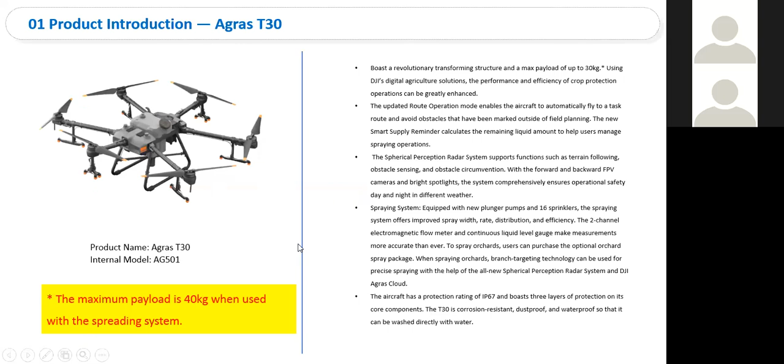Welcome to leave the answer in the chatting room. I think maybe some of you have already found the differences. One minute to leave the answer.

Daniel, do you have any idea about this question? I think it's the same. The integration of RTK flight mode.

Okay, several answers. One more chance.

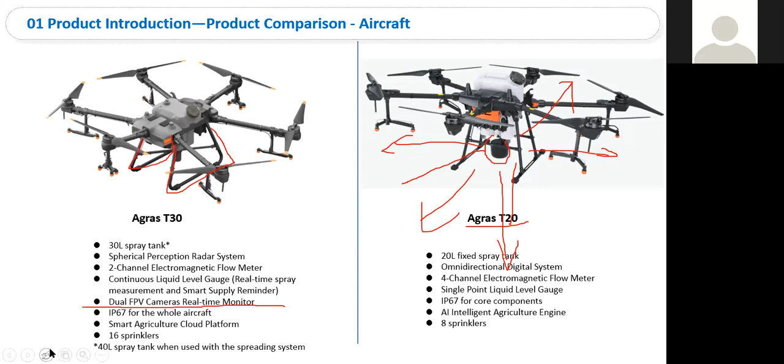One more thing is the FPV camera is different. Can you tell where the FPV is on T20? Any ideas? Front, yeah, on the aerial electronic board, right? Yeah, it's right over here.

For T30, we have two FPV cameras, and it's not on any other modules. On T30, it's a totally single module. Remember this. One is on the front, another one is on the back. Yeah, it's safer, right?

Question: do you get one at the bottom for spot spraying? A lot of our customers ask about spot spraying and being able to see what they're spraying at the bottom.

No? You mean the spotlights on the bottom? A lot of our customers ask if we can include a camera at the bottom for spot spraying. Okay.

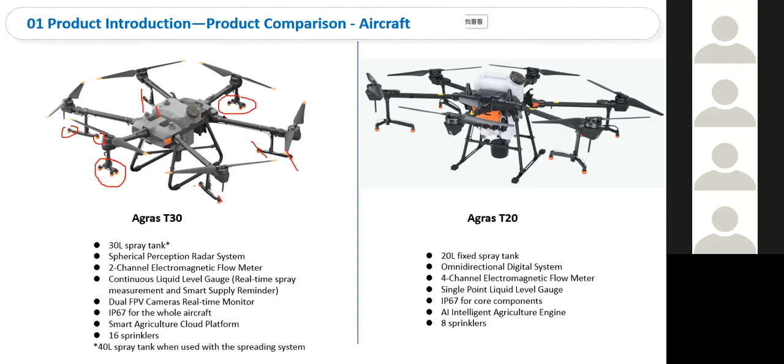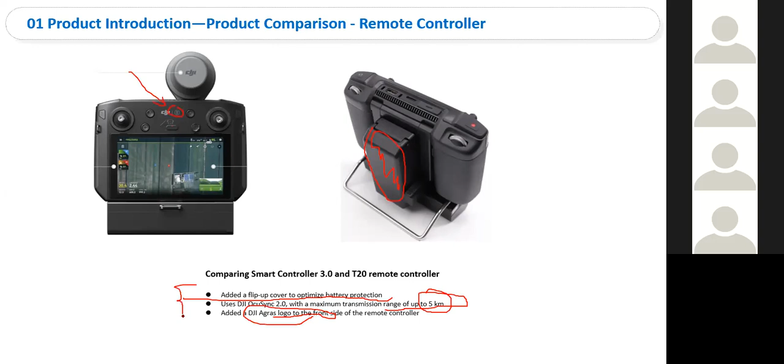And we add a DJI Agras logo, which is right here. Can you find it? So we have totally 3 main differences.

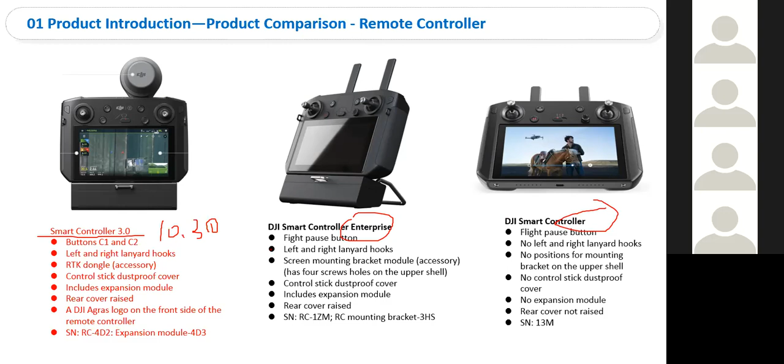You can try if you can do that, because the remote controller, I think you can try. Yeah.

So next page, the biggest difference between them is that we have one more radar, on the front top side of T30. And the battery is stronger than before.

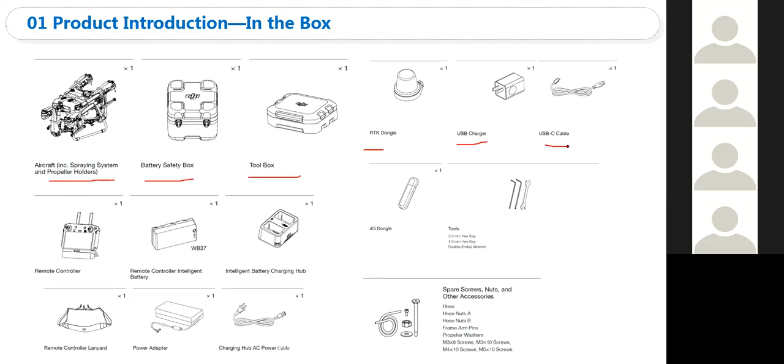This is all the materials in the box. If you are not sure about the materials in the box, you can check with this page to help you find out all. This page can help you make sure there is nothing left, nothing missing in your box, like the aircraft, battery safety box, toolbox, dongle, charger, cables, remote controller, battery, charging hub, or anything else.

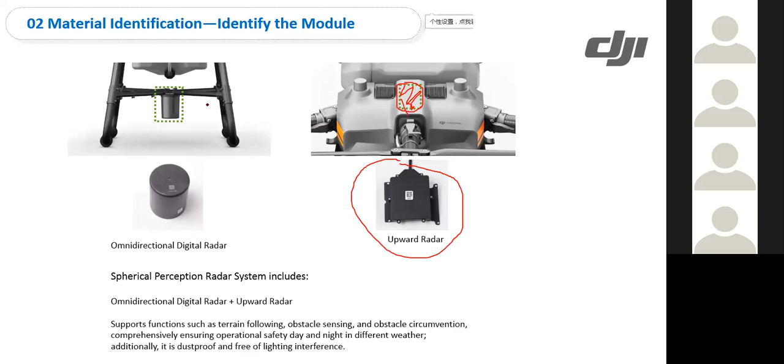We have the differences between them, and we'll talk about the battery and the charger later, after talking about the aircraft.

So aerial electronic system module, do you know what's the function of it? Yeah, it mainly controls the aircraft's flight functions, right? We have the IMUs, we have the CPUs to collect all the information from different sensors, different mainboards, and analyze and send back the control signal to them.

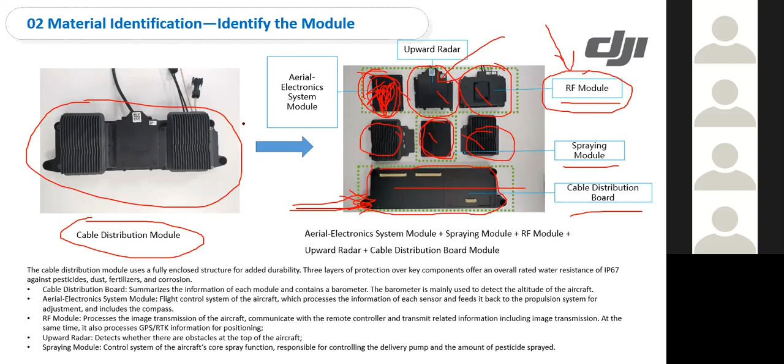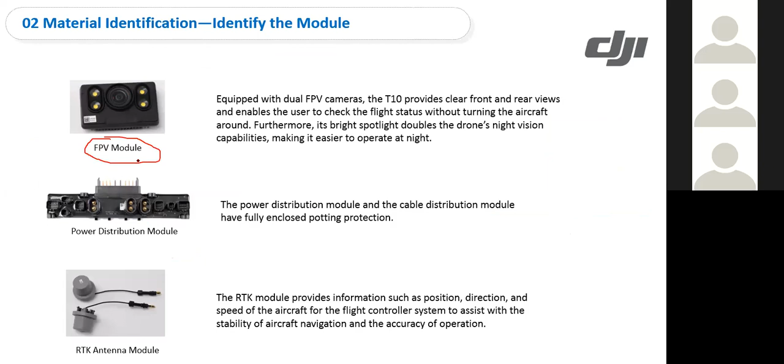And this is how the FPV module looks like. Do you remember where the position of it is? Front? Any other answers? Remember, we have two FPV modules on T30. Yeah, front and back, great.

And we can see the camera here, and we can see the beacon here. It's stronger. The beacon is stronger than before, and you can get a brighter working experience in low brightness environments. And you can see, if the FPV module is not working, you can just take the FPV module out individually. Not like before.

If the beacon is not working on T20, what should you do? The whole board has to be replaced. Yeah, replace the whole board, right? Which means the aerial electronic board. But in the new generation, we can only replace the FPV module individually.

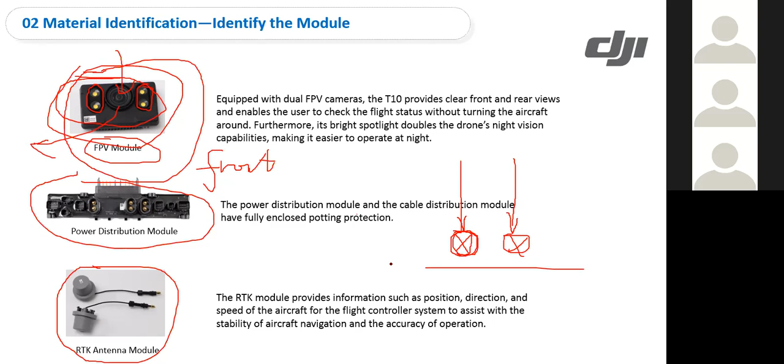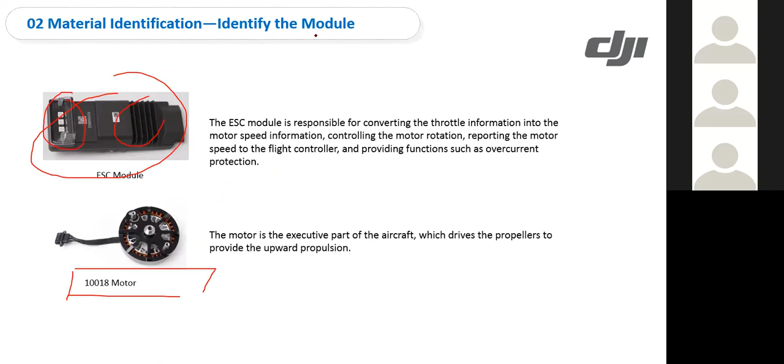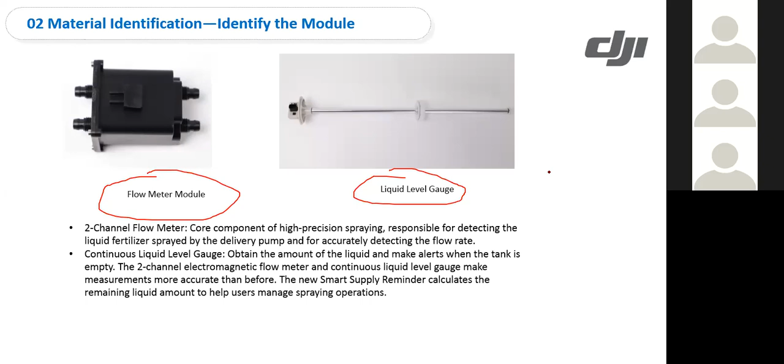In these two parts, we just talked about the basic information of T30. Okay, continue to the most important page, which is called the repair strategy.

Just imagine, what if the power adapter is damaged? What can we do? Do we have to replace the whole aircraft, or just replace the power adapter, or do we have to replace only the cable? Three options. If the power adapter is damaged, we have to replace the whole aircraft, or replace the power adapter, or fix the cable problem.

Just the module, only the parts that have been damaged. Because we have the cables inside, right? We have the cables inside the adapter. We can fix the cable problem, or we have to replace the module, or we have to replace the whole aircraft. Can we fix the cable problems?

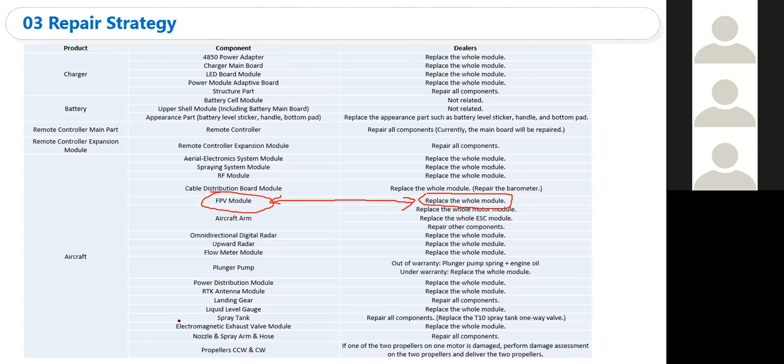Okay, for example, the FPV module is broken on the beacon. The repair strategy of the FPV module is to replace the whole module, right? But if you want to repair the beacon individually, you have to open the FPV module and replace the new beacon inside. In this situation, it will affect the IP rating. So that is the reason why we suggest you replace the whole module, not repair the beacon itself. If you follow this advice, nothing will happen. Okay?

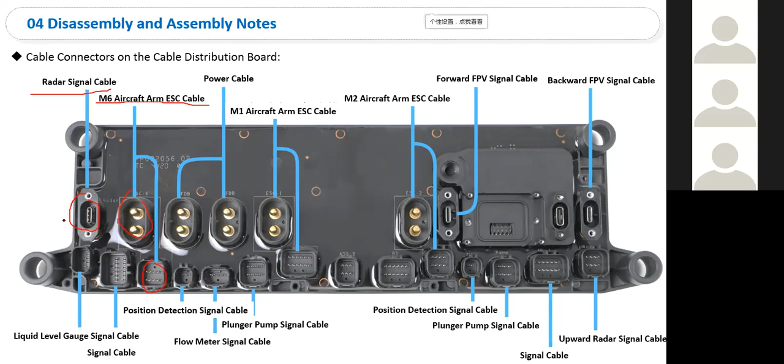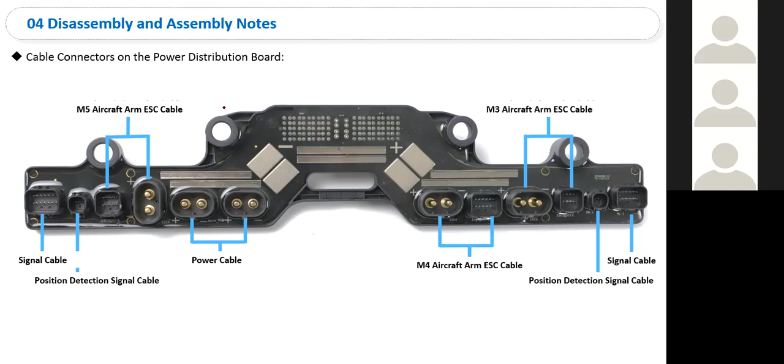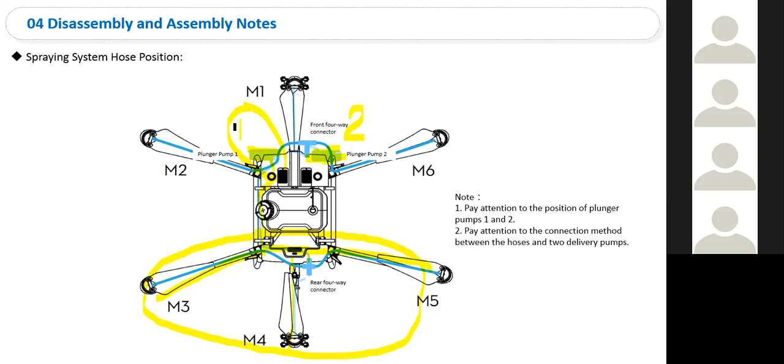For pump number 1, you have to know it is connected to arms 3, 4, and 5. The rear arms are connected to the left pump, which is pump number 1. And pump number 2 is connected to the front arms. Don't do that wrong. We have to pay attention to the position of pumps 1 and 2: left is 1, right is 2, and the left rear arms, right front arms.

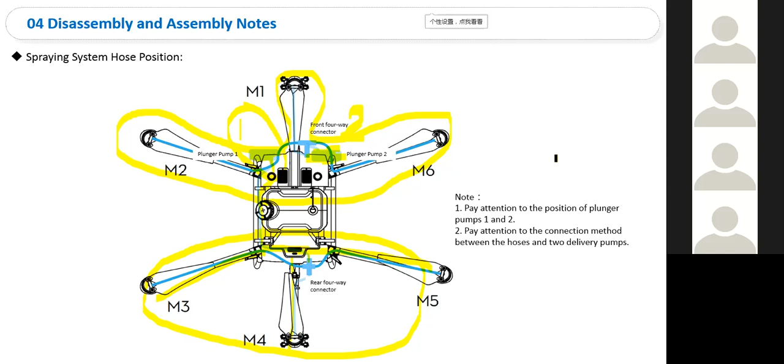After assembly to the motors and propellers, we have to use the screw glue on the propeller screws and the motor screws. Remember, every time you do repair on the propellers or the motors, you have to use the screw glue. Never forget to check the screw after the repair on the propeller and the motors - is it connected tightly, and did we put the screw glue on?

Here, where is the picture? So here, any questions? Is this the blue color glue? It's a common screw glue, you can just use the common model screw glue. It's a glue that makes sure the screws are fixed on the right position.

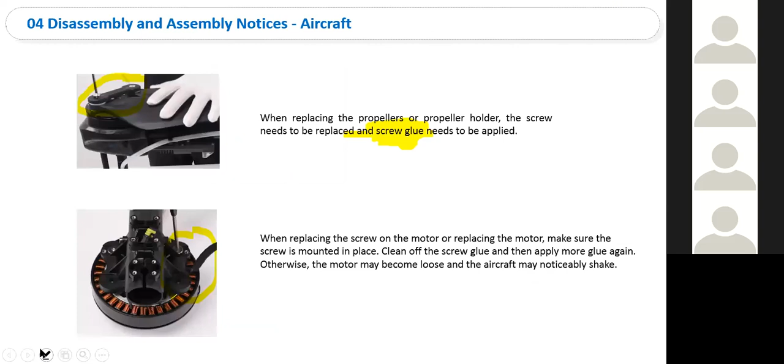Let me check if it has another name, called thread lock. Wait a minute. Yes, the screw glue has another name, called thread lock. Thank you for the explanation. Yeah, it's thread lock. Remember, back to this page, use the thread lock right here and here. Don't forget.

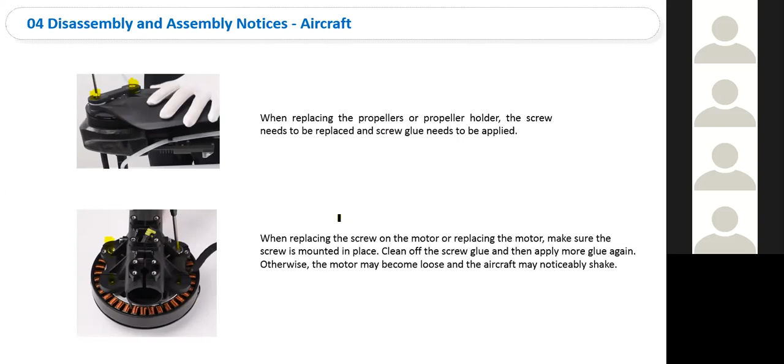Next, we have to use another thread locker here. We have another position that needs thread lock right here. Can anybody tell me where this position is? It's the arms, right? Between the arms, we have the axles and screws connecting here, and for this part we also have to use the thread lock. We have to apply it on 3 different positions, which is here, here, and here.

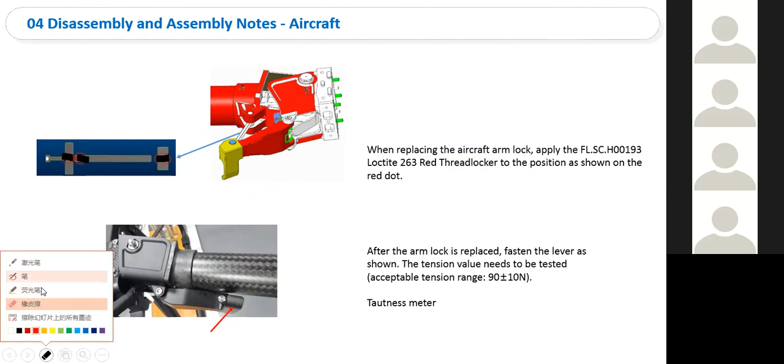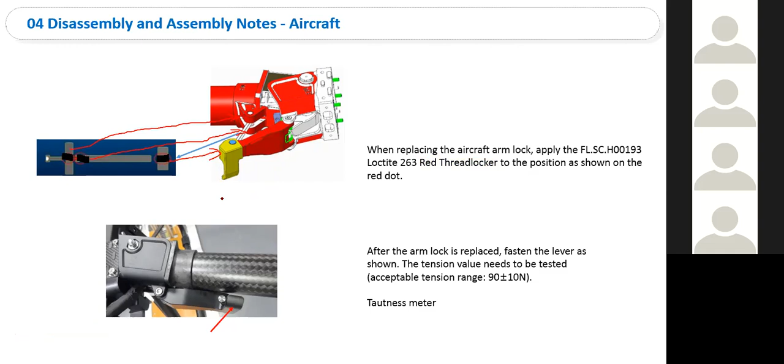One, two, three, and which is related to... let me use a smaller pen. It's related to here, here, and here, which is here, here, and here. Use this type, this model.

After the arm lock is replaced, fasten the lever as shown. Then the tension value needs to be tested. For here, we need to use a test tool called a tautness meter to make sure the tension range is around this data. Remember, it's very important - first, 3 points to use the red thread, and make sure the tension range.

Is there any material we can use to protect the plastic bag parts, just the Agras models? The maintenance is very important every time after the work, every day.

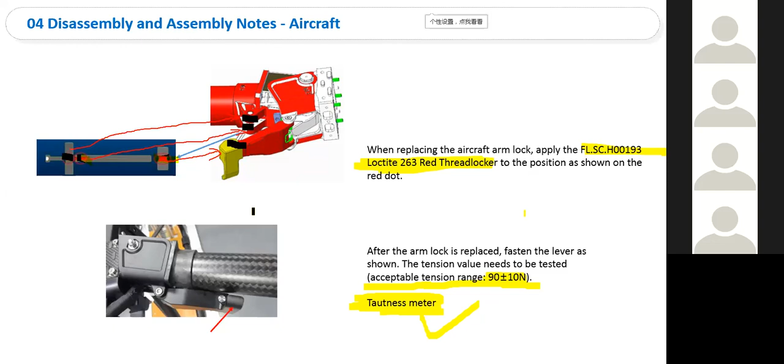There is no good method to prevent the damage from the drugs. Yeah, we have no good method to prevent that.

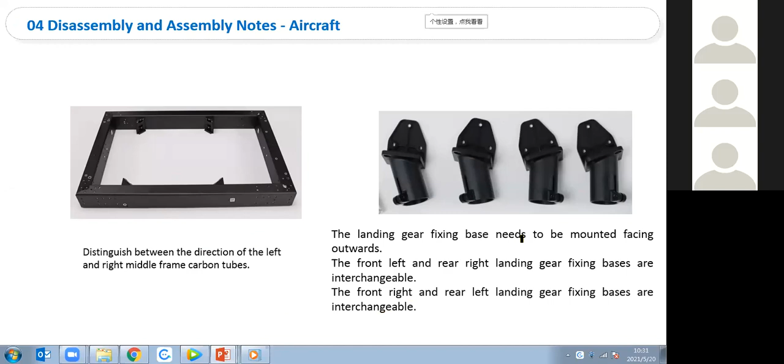This is the middle frame, and this is the landing gear connector. Here is a very important thing about the installation of the radar: pay attention to the installation direction of the landing gear and the radar signal cable. The radar signal cable needs to be attached to the left side, which is this position. This position needs to be on the left side.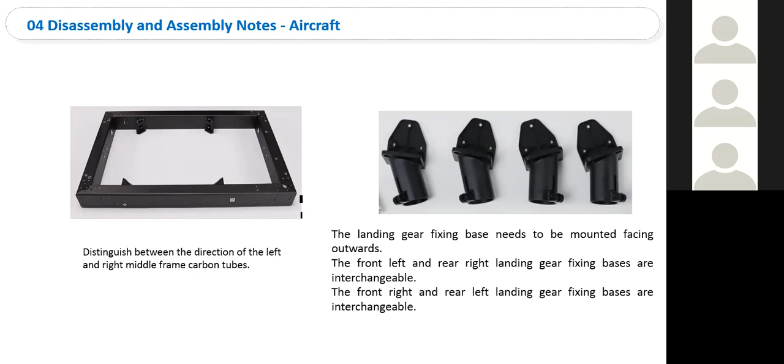About the disassembly and assembly of the remote controller, the front and rear frame: it's very difficult to do the disassembly because it's very tight. You have to follow these notices.

There are buckles between the upper and lower shells, which are very firm after assembly. When removing the lower shell, first unscrew all the screws, hold the lower shell right like this, with your hand, and then remove it forcefully. It's very difficult and hard to do that. You can try after the training.

If you need to remove the front cover's decorative piece, this is more difficult than removing the lower shell, because it's very, very easy to be damaged. You can say the decorative piece damages every time if you need to do the repair on it. So how do you do it?

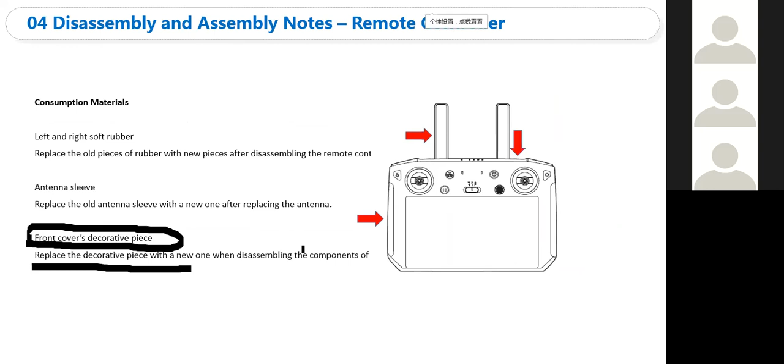So here is the principal diagram. As you can see, it has so many characters, so many squares. Never mind, you can just try to draw it down after the disassembly.

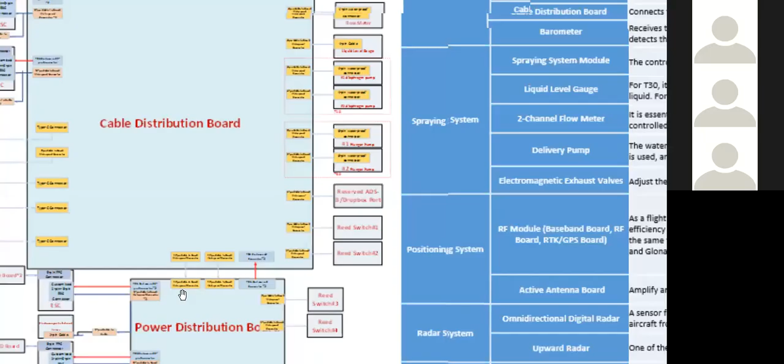How to draw it: you can start with the battery. For example, here is the battery, and then you will see which main board, which cable, is connected directly with the battery, and then you will see the power distribution board. After drawing down the power distribution board, you should find what exactly the modules and sensors connected directly with the power distribution board, and then you draw down all of them.

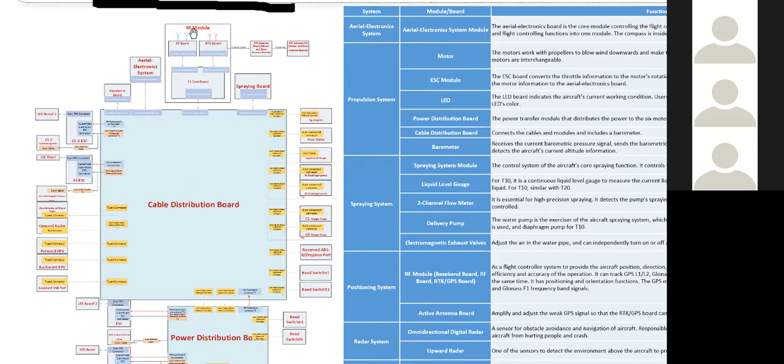After that, you need to find which main board, the biggest board, is connected directly with the power distribution board, and then you draw down the biggest board. Then you need to find out what exactly the sensors and modules connect with this board, and you draw it down. Then you will find the second size module, which is this one, and you will see other sensors connected with it.

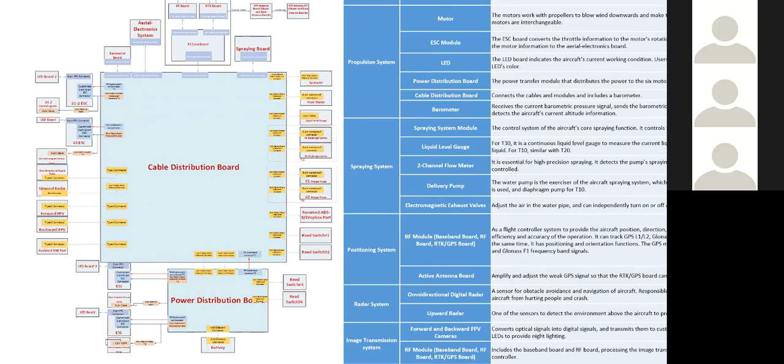After finishing that at least once, you will find it's very, very easy to understand the principal diagram. My advice is to draw it down from the battery, one by one: battery, power distribution board, cable distribution board, and draw them down to find what sensors and modules are directly connected with them.

What can we do with this principal diagram is use it as a damage assessment tool. For example, what will happen if the T30 is not working on the power and cannot be powered on? Which part should we need to check first, according to the principal diagram?

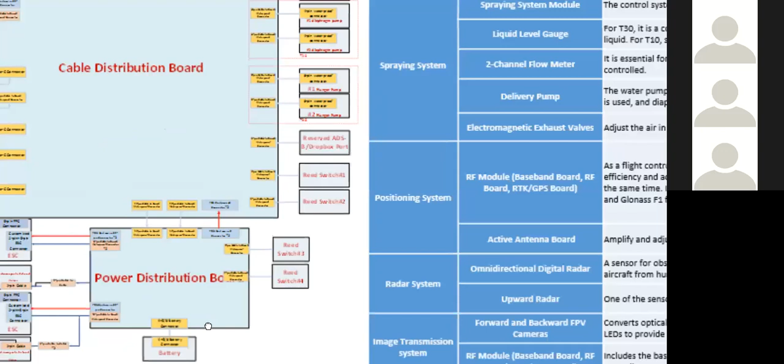Start from battery. According to the principal diagram, we need to know which part is in charge of the power supply. The battery is in charge of power supply, so check the cable between the battery and the power distribution board, don't forget it. Check the power distribution board, because it assumes the power from the battery and distributes current to different boards so our aircraft can work normally. So we have to check the battery first, try to charge it, check the cable or connection between battery and power distribution board, check the middle part, and after that, check the power distribution board.

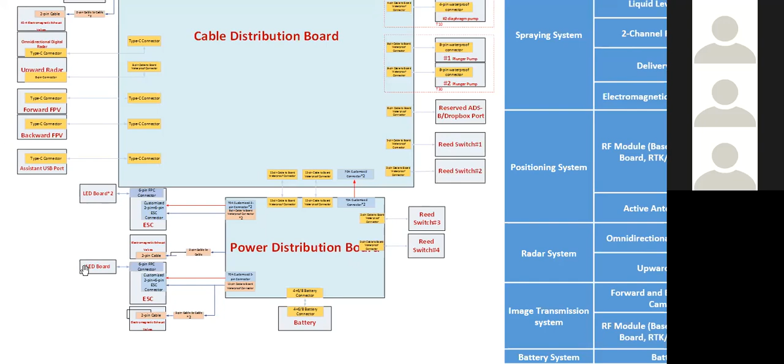My second question is, what if this LED is not working? Which part should we check first? According to the principal diagram, we need to check the cable and check if the LED is damaged or not. Then we need to check the connector on the ESC board.

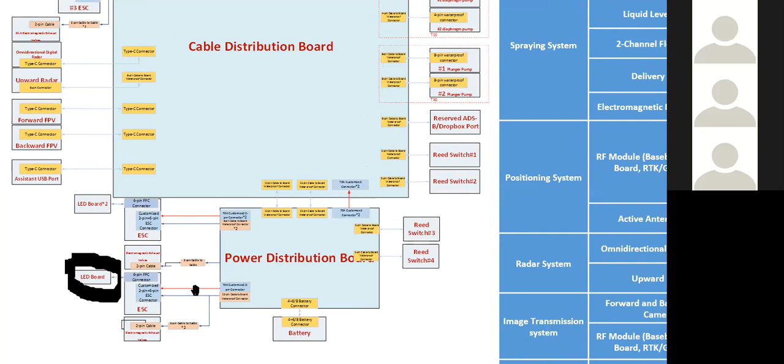Then we check the cable between ESC and power distribution board. What will happen if this cable is not working? If this cable is damaged, the ESC is not working, which will cause the related motor to not work, not only the LED board. So in the question situation, only the LED board is not working, the motor is working fine, which means the damage only happens on the LED board or cable or connector. But if in this situation the motor is also not working, which means this part has the problem.

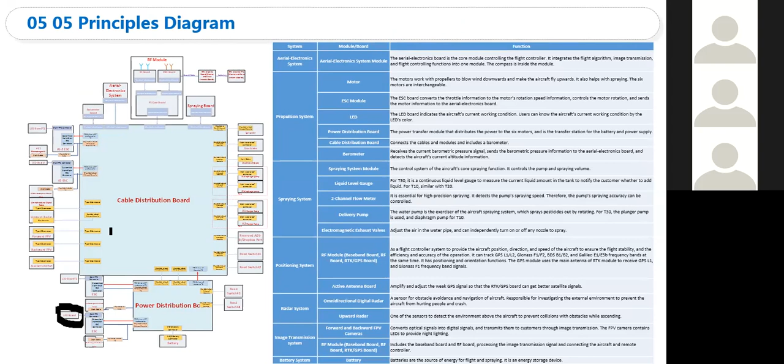So I want you to draw down the principal diagram after finishing the disassembly. It's very meaningful and helpful for you to do the damage assessment very quickly.

Can a Type-C connection cable be replaced in case of breakage? You mean you want to- I'm not sure which Type-C connection cable you mean.

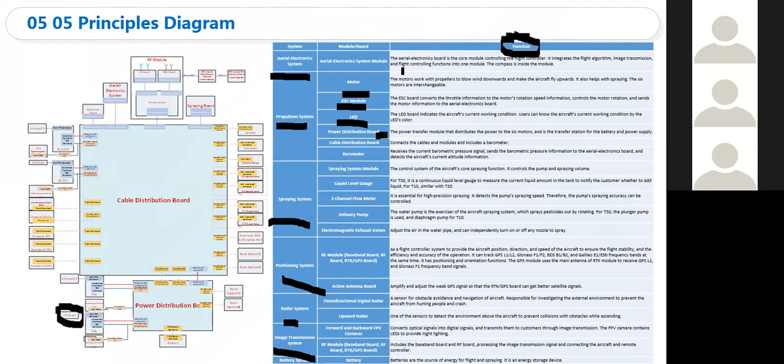One more thing about this page is that it describes the functions of each module: motors, ESC, power distribution board functions. You can read them very carefully after the training.

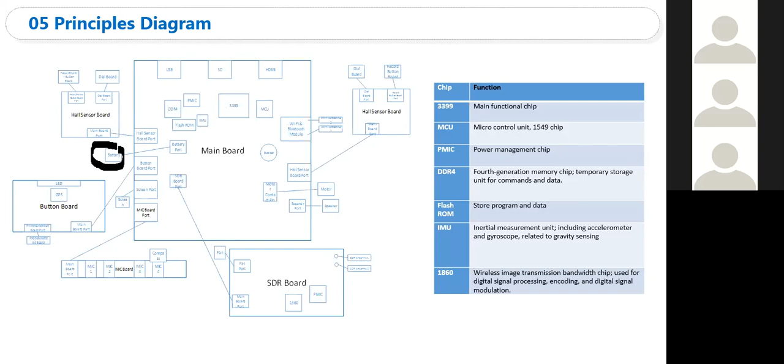So this is the principal diagram of the remote controller. It's the same method, we draw down from the power supply system. So you draw down the battery first, and then you will find the main board, and then you will find the hall sensor board, button board, mic board, SDR board, and the hall sensor board again. Then you draw down all the sensors connected with it, and you will get more familiar with this module.

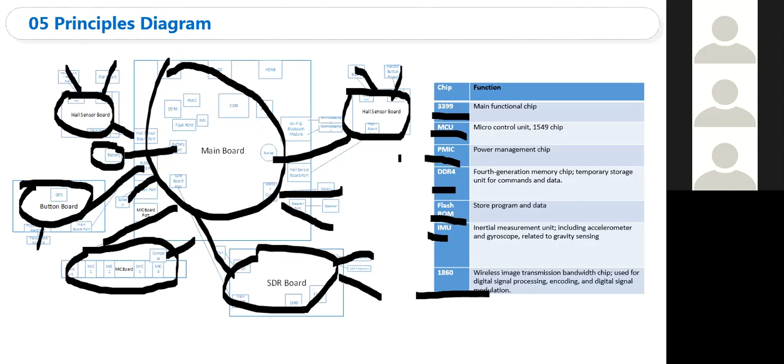And here are the functions of each. And this is the malfunction assessment and analysis. In this topic, it can tell you the standard damage assessment procedures.

Start power on, start the damage assessment, do the visual inspection. Check whether the product can power on. If not, check the power supply system. If yes, perform the functionality test with the app and see if the test is passed. If yes, end the test. If not, follow the function failure assessment process.

The function failure assessment process is right in the coming topics. So we will list different situations, different malfunctions, like if the product cannot be powered on, check the following: 1, 2, 3. If the functionality test or link test fails, this is the test procedure. First, linking test, check the linking between remote controller and the aircraft, and HMS check, and follow them one by one.

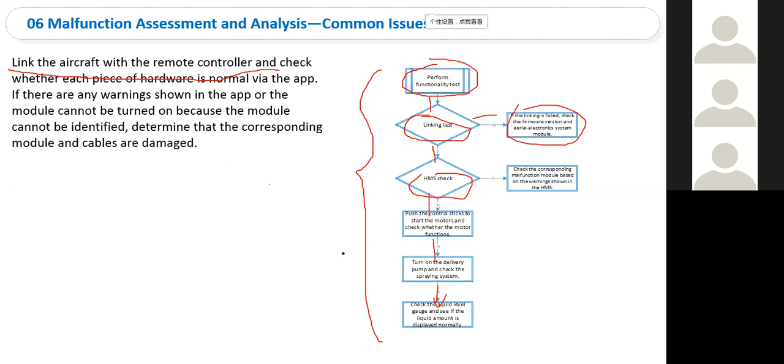Any questions about these two parts? This is the common damage assessment procedure, this is the situation damage method, this is the test, and this is the test after repair that you need to do. Okay, if not, I will move on. If yes, you can leave the message about your question.

So in this page, we can know exactly what modules are interchangeable between different models, between T16, T20, T10, and T30. Like the motors, as you can see, the motors of the 4 models are not interchangeable. They need to use the motors that they use.

But the silicone rubber pad is interchangeable between the 4 models, and the Teflon gasket is interchangeable, and the propellers are interchangeable between T20, T10, T30.

And for the modules inside, it's interchangeable between T10 and T30, like the aerial electronic system module, spraying module, RF module, RTK module is interchangeable between T10, T30. The radar is interchangeable between T10 and T30. The delivery pump is interchangeable between T16 and T20. The FPV is interchangeable between T10 and T30. The ESC and the remote controller are interchangeable between T10 and T30. If you forget which module or accessory is interchangeable, you can refer to this page.

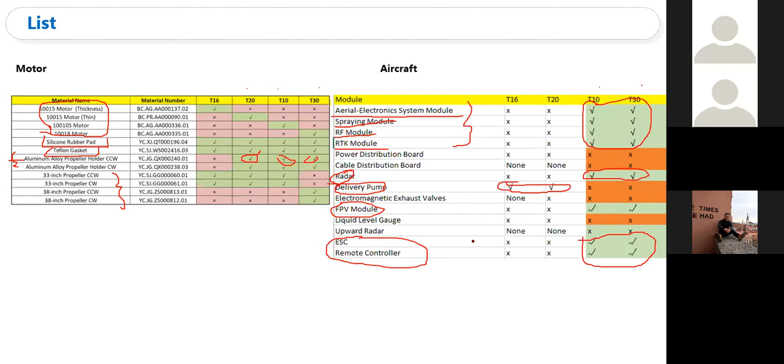So far, do you have any questions about T30 and their basic information? Okay, if not...

We'll move on to the chargers and the batteries. About the batteries and chargers, this part will be fast. The same topics: product introduction, material identification, repair strategy, disassembly and assembly notices, principles diagram and boards introduction, test plans and fixtures, malfunction assessment and analyze - the same as the T30's topics.

The battery of T30 and T10's battery is different. They cannot be interchangeable. And its IP rating is IP54. The capacity is different.

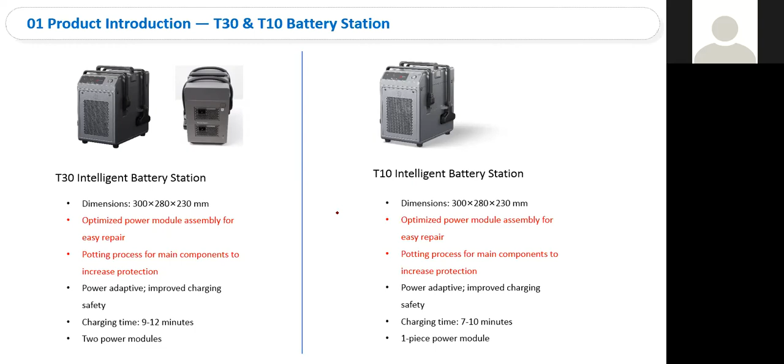And the differences between T10 and T30's intelligent battery station is different. Even though they look very same from the appearance, but inside they are different - like the main boards, like the cables has a little bit different, so they cannot be interchangeable between T10 and T30. This is how they look like.

How many charge cycles? Let me check. Here: 1,000 charge cycles or 12 months, whichever is sooner.

Is DJI releasing a generator? Any information of flight time per battery model? Okay, Alvin, I will reply to you this later after talking about the battery. Never mind.

And just remember the storage of the battery needs to be very stable and suitable, okay? And the operating temperature range of the battery should be between -5 to 45 degrees. Okay. Yeah, after 12 months, you have to replace the battery for safety.

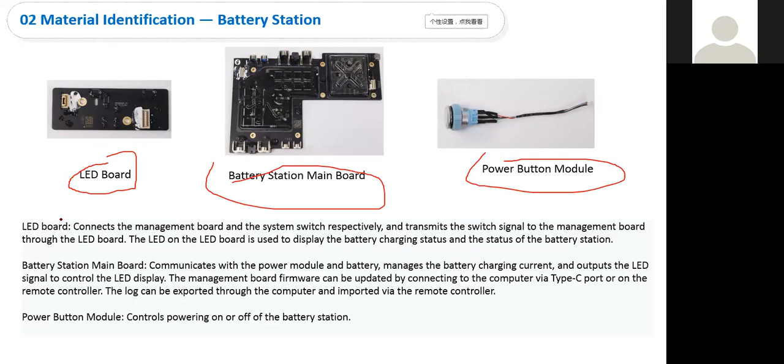Despite the LED board and power button board, let's talk about the battery station main board. It communicates with the power module and battery, manages the battery charging current, and outputs the LED signal to control the LED display. The management board firmware can be updated by connecting to the computer via Type-C port or on the remote controller. The log can be exported through the computer and imported via the remote controller. So this is the very important main board of the station.

Okay. The warranty details of T30's battery: we have 1,000 charge cycles or 12 months. It depends on whichever is sooner. Is it clear?

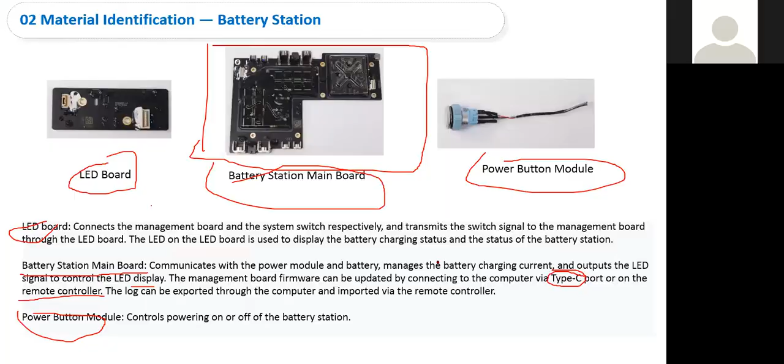Yeah. Okay, let's continue. This is the charging cable, the module, the power module adaptive board. If you are interested about the functions of them, you can just read it after today's training.

This is the battery's main board and the battery upper shell module. We have less main boards inside, so the repair is very easy compared to before. So let's take a look at what we can do in different repair situations.

For the battery station, if we are facing damage to the power module, what should we do? We need to replace the power module. Never try to fix the power module, like the sensors on the board, sensors on the power module, the cables, or the core thing on it. How many batteries can be charged at the same time in the battery station?

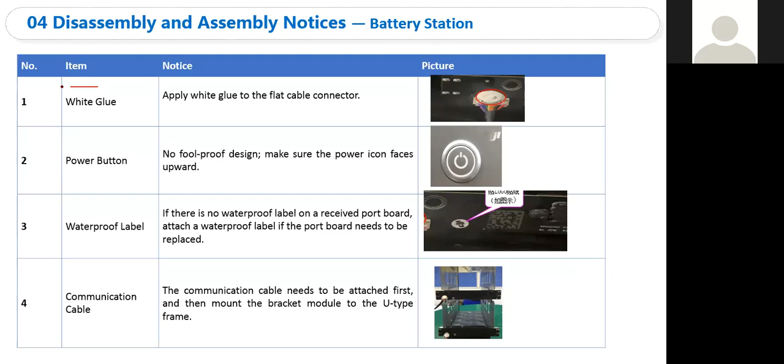And here are some notices during disassembly and assembly. White glue is required to apply to the flat cable connector, like this.

The power button has no foolproof design, so in this situation, we have to make sure the power icon faces upward. We have to put it on the right direction, because we can see the DJI logo here, and this should be on the top side, facing upward.

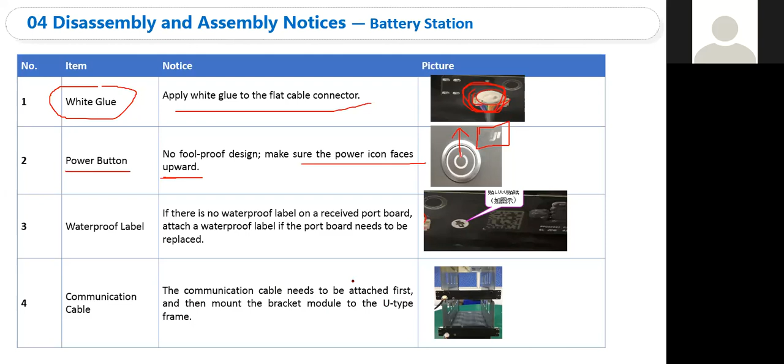And the waterproof label - if there is no waterproof label on a received port board, attach the waterproof label if the port board needs to be replaced. Remember this. And the communication cable needs to be attached first, and then mount the bracket module to the U-type frame. Just remember this, and this should be followed according to the different data.

Do you remember which part we need to draw down first when we are going to do the principles diagram? Yeah, the power part. Yeah, the power part. To the battery station is the charging port, right? Yeah.

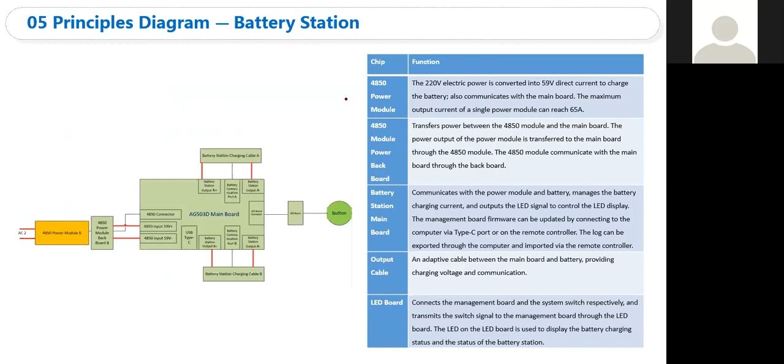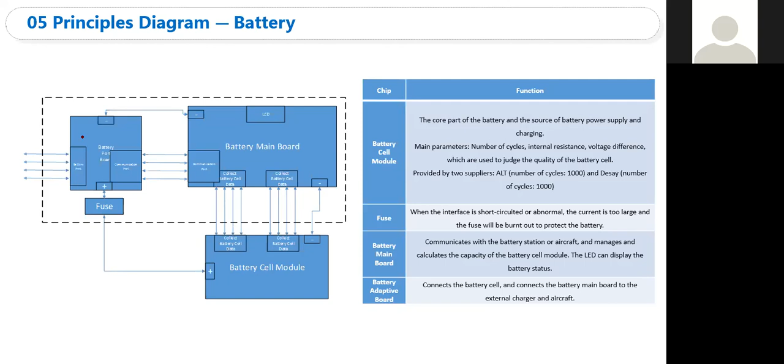So I'm not going to explain more about this. You need to spend time to draw it down at least once after the training. It will be helpful for you to understand the new machine very clearly, very easily, okay? And this is the same for the battery - we need to draw the power outlet part first.

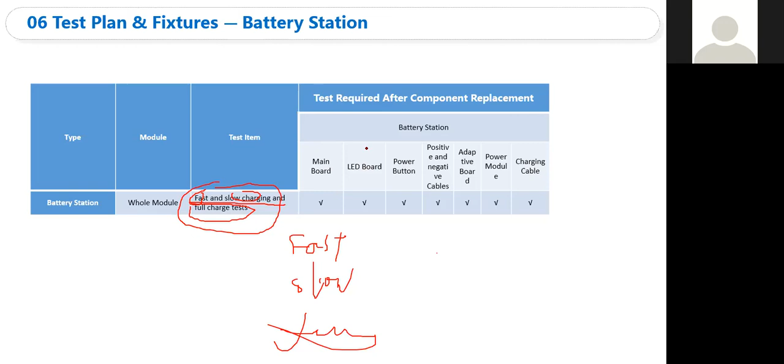And this is the test that we need to do after the repair. Only one test we need to do after repairing the battery station is to fast and slow charge to check these two modes. And the third test step is to check the full charge test. Fast mode, slow mode, fully charge. And this is the procedure that you need to do.

Do the damage assessment. Visual inspection, check the AC cable and charging cable. Check the cable first and export the log, update the battery station, update. Don't forget to update. Full charge, analyze the malfunction, end.

And how about the battery - it's the same. Visual inspection, power on and off test. Water damage assessment, check warnings on the assistant software, which is the DJI Assistant. DJI Assistant can be downloaded from our website.

And first, fully charge. So as you can see, the visual inspection is very basic and very important that you need to do every time you're going to do the damage assessment on every machine. Not just the agras, consumer level, or enterprise level - every machine requires you to do the visual inspection first. So in this part, it requires that you know what is the common good condition of a machine from the appearance, so that you can find the damaged part easily and correctly.

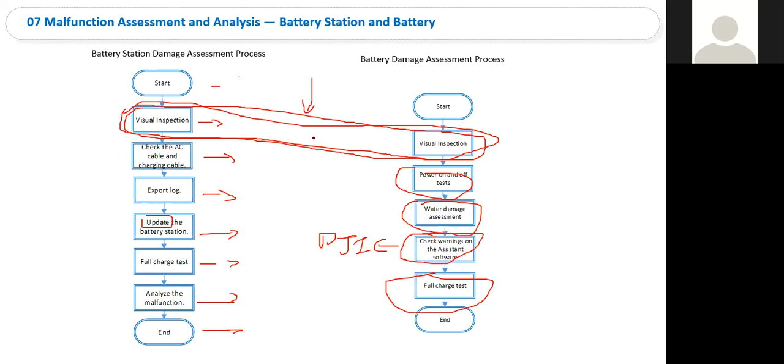And here is some damage assessment advice from the LED blinking pattern. If it shows different colors of the LED and has different sounds, that indicates different meanings. For example, solid yellow with no sound - the description of the malfunction is the main board is malfunctioning and the power is limited.

So what can we do when we are facing this situation? We just need to change the main board. For example, if it blinks red once continuously and shows D, D, D like this, then you just need to change the power module directly, and so on for other situations.

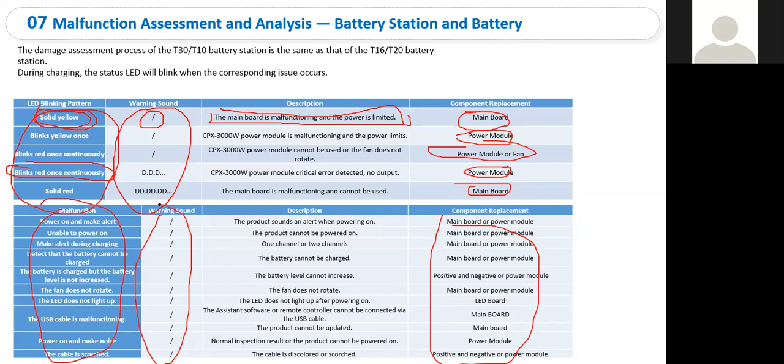Okay, this is how this page's sheet looks like and how we use it. So far, do you have any questions about the battery and the battery station?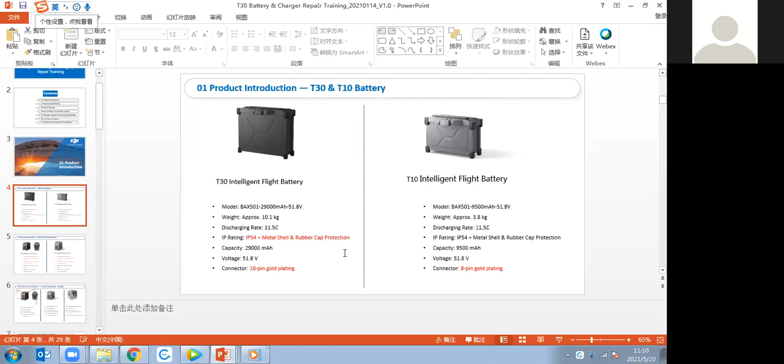How many minutes to charge for the T30? T20 fast mode, right? No, T30. Yeah, fast mode. You mean T30 or T20? T30, yeah. Let me check. Here is the charging time. Fast, 1825, and slow. Okay, it's good. Thank you very much. You're welcome.

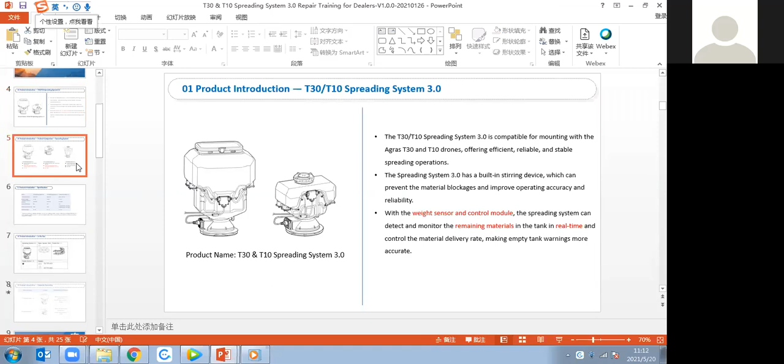Lastly, we are going to talk about the spreading system. It's very easy, you just need to know that they are not interchangeable between T10 and T30's spreading system. It's different than the previous one, and not interchangeable between T10 and T30. You can see how it looks like, right? It's totally different.

There is nothing difficult or special to discuss on the spreading system, but for the new generation, the spreading system is larger, stronger, and more efficient.

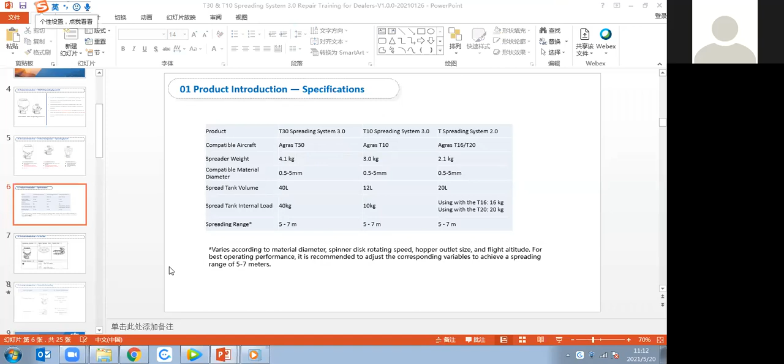Warranty of the battery, we'll talk about it later, we just talked about that minutes ago. Later I will talk about it. This is how the accessories and modules look inside.

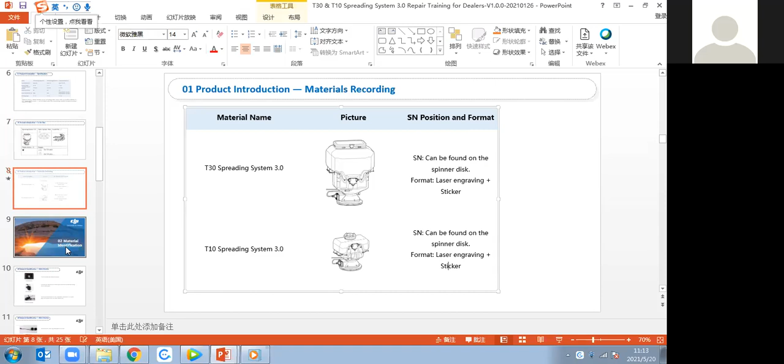This is the serial number stickers location, which can be found on the spinner disc. This is the main modules inside the spreading system. I'll put it larger.

The core module of the spreading system is the control module. The servo module controls the changes of the hopper gate angle and the opening and closing of the hopper gate. If you find a problem with the working of the gate and its opening and closing function, you need to detect the servo module, okay?

The reduction gearbox drives the stirring device to spin, brings the materials to the hopper gate, and spreads them out of the hopper gate.

Yes, Mr. Arya, right?

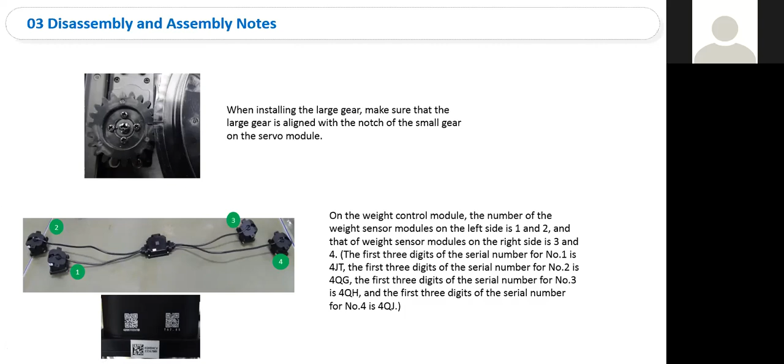First, we need to update the firmware using our DJI Assistant on our official website. Next, we need to connect with our remote controller and enter our app to do the functional test. And write the weight value K, which means we need to do some calibration on the remote controller.

Here is one important thing we need to pay attention to: the value K needs to be written again when the load sensor is replaced.

Remember this. Maybe most of you haven't received the T10 or T30, so if you are going to do the repair on it by yourself, you can open the recorded video of today's session and turn to this page in the PowerPoint to help you do the repair well.

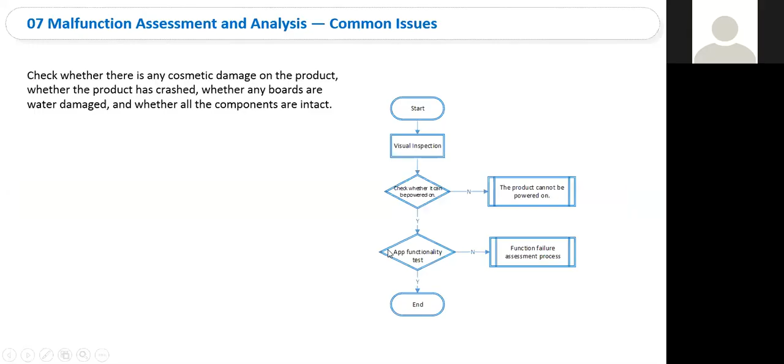So this is the differences, and this is the same procedure: start visual inspection, check whether it can power on, app functional test. It's the same.

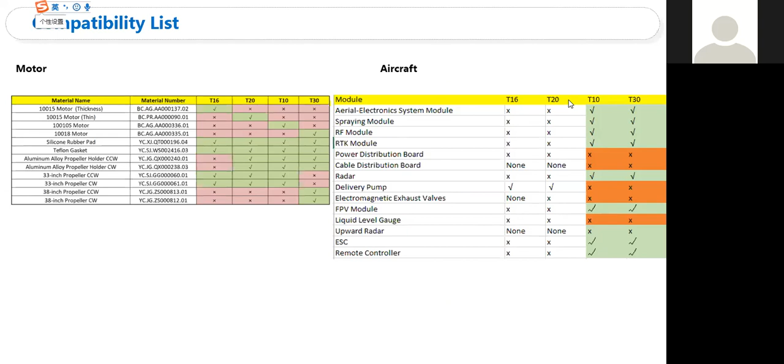And it's the feedback on the interchangeable modules and accessories between T16, T20, T10, and T30. If you forget which accessories and modules are interchangeable, you can refer to this page to solve all your doubts about this part. So far, do you have any questions?

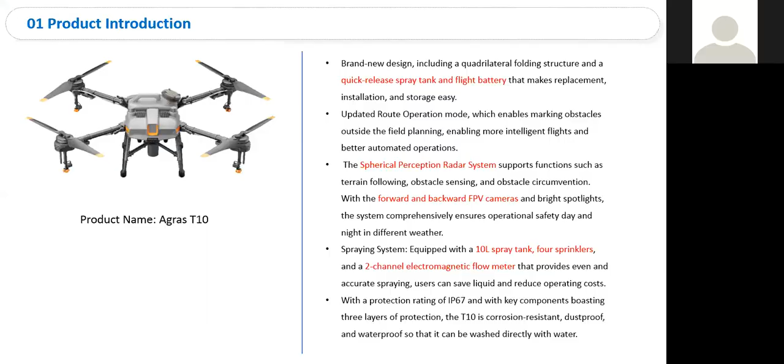Let's have a brief introduction of T10. T10 is smaller than T30, but basically the same from the appearance. The biggest difference between them is about the arms. We only have 4 arms on T10.

When T30 and T10 will be available for Europe, I think you need to check with your regional manager, but I think it will be soon. I'm not sure about this kind of question, sorry about that.

We also have 2 FPV, 2 camera, and the IP level is IP67. DJI generator - let me check. I'm not sure about this kind of question, when it's available in your country.

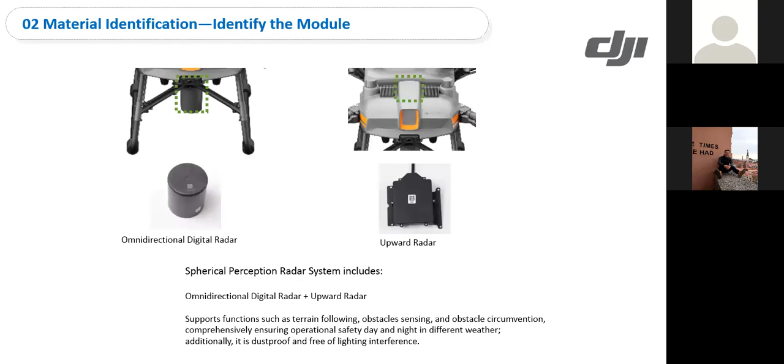The remote controller between T10 and T30 is the same, okay? There is nothing different compared to T30. So just make it quick, let's take a look.

Here is one thing about the pump. Do you remember which pump is number one on T30? The left one or the right one? For T30, the pump number one is the left one, right? But for T10, the pump number one is on the right one. Remember this, it's very interesting.

The right pump is in charge and connects to the front arms. The left one is in charge and connects with the rear arms. This is the difference between them, and otherwise it's the same.

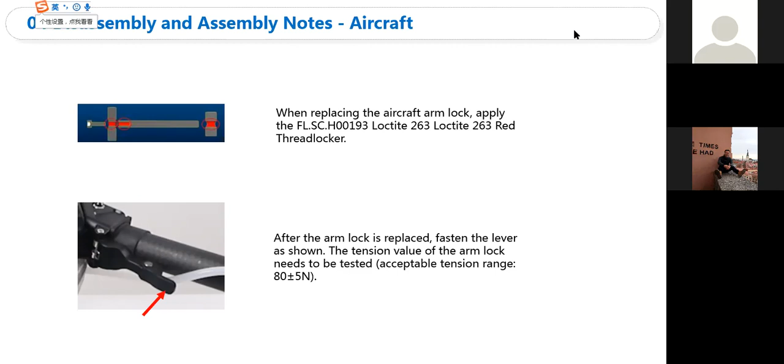For this, need to apply thread lock. And here we need to use the meter to make sure of the acceptable tension range. The acceptable tension range between T10 and T30 is different. Do you remember the tension range of T30? Yes, great, great answer from Carlos. Yeah, nice, good, nice to hear that.

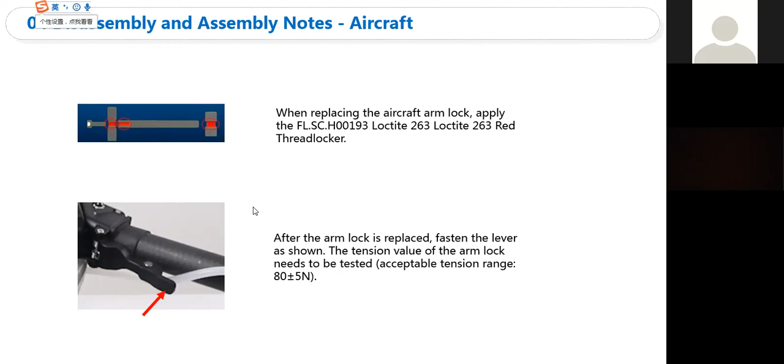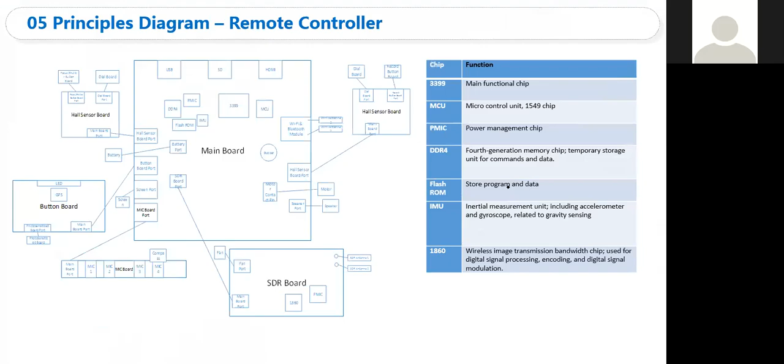So the others have no differences. The principal diagram drawn from the power supply system, and the malfunction procedure is the same as the previous one. Individually, from the visual inspection, next functional test, a functional check, and last functional check.

Okay, so far, any questions? For the generator, we'll talk about it maybe in the next training.

Pressure washer - I'm not sure about this question, honestly. It depends on what kind of pressure level. If it's too high, over pressure, it's not obvious to reply. The one used for cars - theory speaking, it's available to use this kind of pressure washer to clean it. It did, yep.